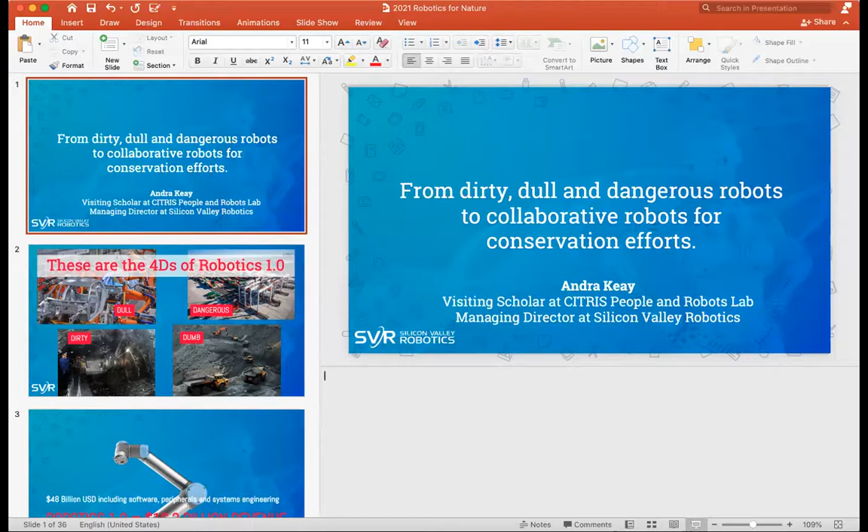I gave this presentation recently, and it's a more specialized one than I would sometimes do, but there are some key concepts that I want to raise. This one is focused on robotics for science and conservation, which I thought you might find pretty cool.

I want to start with some of these key concepts, because very often people are very familiar with their area of robotics and they don't have the opportunity to see the big picture. Whereas I'm really focusing on the big picture.

You've probably heard that robots are good for the dirty, dull, and dangerous jobs—the 3Ds of robotics, I call it.

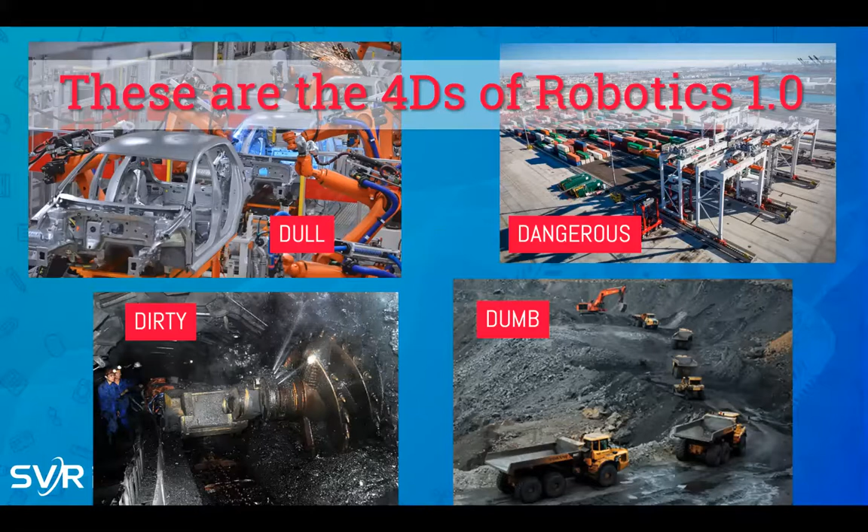Okay, so I call it the 4Ds of robotics, because these robots are dumb. I refer to this as Robotics 1.0, to help people understand that we've had a sea change in robotics that is far more than just more robots.

We've had 50 years of Robotics 1.0, and they're dirty, dull, and dangerous robots—dumb robots, doing dirty, dull, and dangerous jobs, quite dumb, repetitive jobs. In fact, these robots don't meet the standards for what is a robot now. They are just not reprogrammable enough in many cases, or they're not reprogrammable without a lot of expense and effort.

50% of the Robotics 1.0 industry is still doing nothing but welding automobile bodies. That was the first thing these robot arms were put to work doing, and that is still 50% of what people talk about when they talk about the robotics industry. That's not the robotics industry that I know or see, and this is why I call it Robotics 1.0—to really emphasize that things are a lot different.

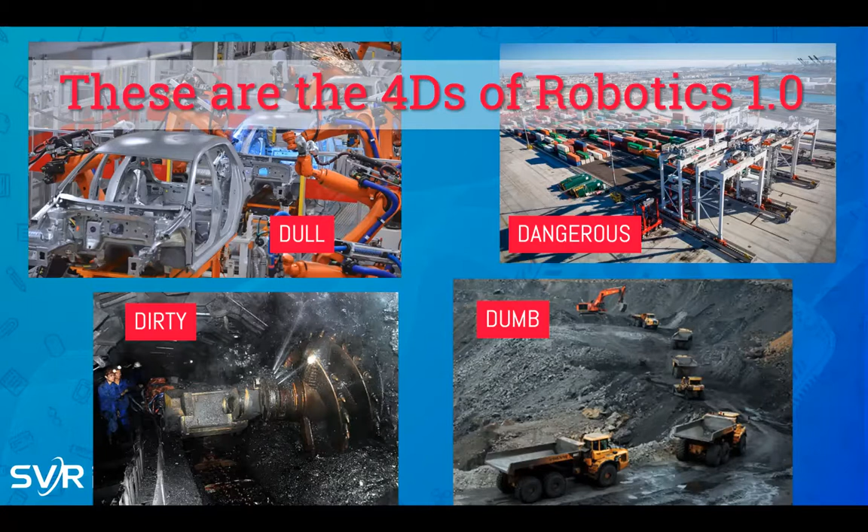Now, it's not that robotics 1.0 is not important. It is a large chunk of what's happening in robotics. It's worth approximately 48 billion last year, which was approximately 18 billion for the robots alone, and that's 48 billion cumulatively when you bundle it together with the software and the servicing, which is usually how these robots are sold, as like a full package.

And what we're in, and we have been since around the start of 2010, is the robotics 2.0 era, which is quite a paradigm shift. And we will move to a different era of robotics, but I don't know exactly when. It might be 50 years from now.

And one of the issues that we find is that you will see research videos widely promoted in media, and it can be tricky to know which of these are really robotics 3.0, nowhere near real world yet, and which one of these are actually rippling out into the real world. So there's a couple of criteria that robotics 2.0 has as well.

And one of them is inspired through the growth of the self-driving car. Most cars these days are robots. In fact, pretty much everything from 2008 qualifies as a robot, at least within parts of the systems. We don't need to have level 5 autonomy in cars to have robotic systems. Most roboticists that I know have spent some time working on autonomous vehicles, or still do. And it's not simply self-driving vehicles, of course. It's autonomous vehicles across the board.

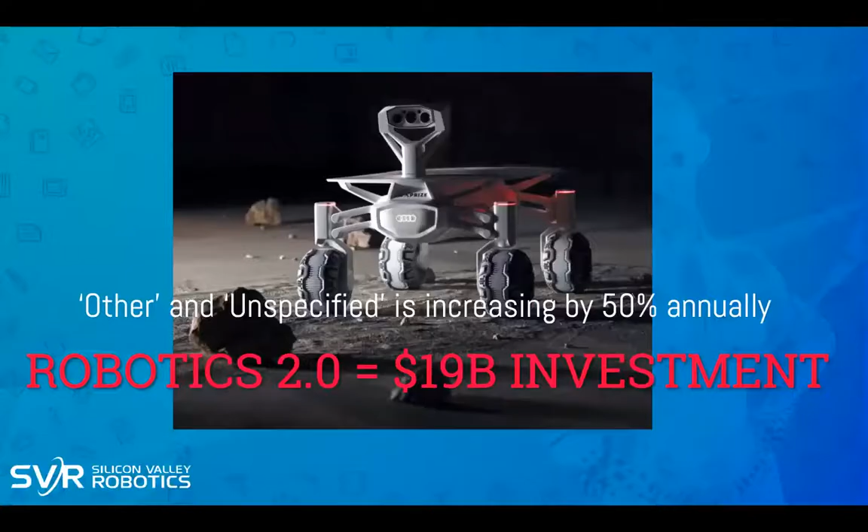Now, robotics 2.0, you don't measure it by looking at revenue because many of these companies are pre-revenue. And that's why it doesn't appear in a lot of the robotics industry discussions. It's simply not on their horizon yet. But if you measure funding, investment into robotics, then you can get a much clearer idea of what the shape of robotics 2.0 is, because right now it is largely investment funded rather than revenue, although that will shift over the next 5 to 10 years.

Now, these are categories that the robotics industry, the robotics 1.0 industry, calls other and unspecified. They're growing exponentially each year. And in 2020, it was a total globally of $19 billion in investment. So you can see that the investment in the robotics industry is actually greater than the pure revenue from the old robotics industry. And that's just a sign of how much things have changed in the last 10 years.

Dr. Gill Pratt, who is now managing Toyota Research Institute, who when he was the head of the DARPA Robotics Challenge, he said, I think we're having a Cambrian explosion in robotics. And I think he's quite right. And I think he's particularly right because if you really look at Robotics 1.0, it's primarily stationary in many ways.

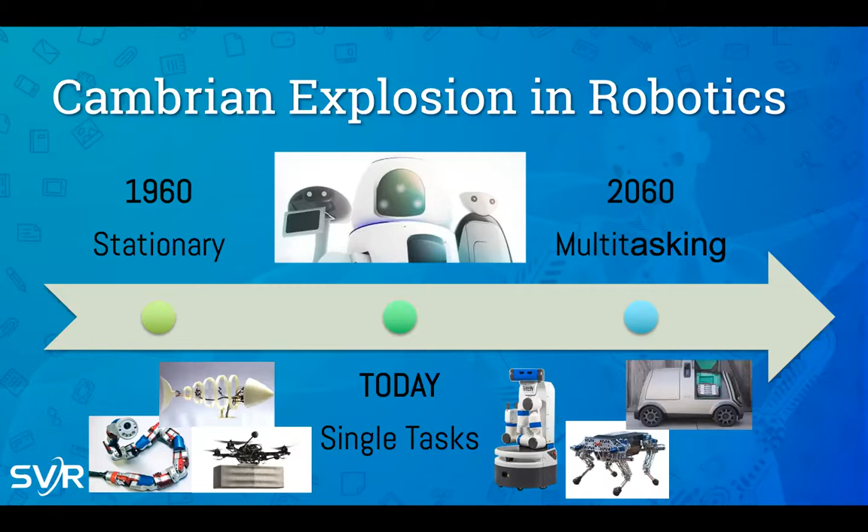Robotics today is mobile in the sense that it has the ability to navigate.

And the Cambrian explosion biologically happened because of vision. Small little worms and tiny organisms developed a visual sensor. And that allowed them to chase their food, not just squirm their way in and out of patches of food. They were able to direct themselves towards food. And often that meant other organisms, so they also started to run away. That led to a really rapid evolutionary period where the basis of every single phyla or category of biological life emerged in a very short time frame, comparatively speaking.

And I think that this GIF, I love it. I think it expresses both the biological Cambrian explosion and the robotic Cambrian explosion, because you're probably all familiar with robot vacuum cleaners. And you know that the original Roomba vacuum cleaner was very stupid. It was modeled on insect behavior with Rodney Brooks's subsumption architecture, and it didn't map. It didn't have sensors other than it had a bump sensor to detect when it hit walls. It had a little dirt sensor so that it would circle when it hit a particularly dirty patch, and it might have had an edge of stair detector.

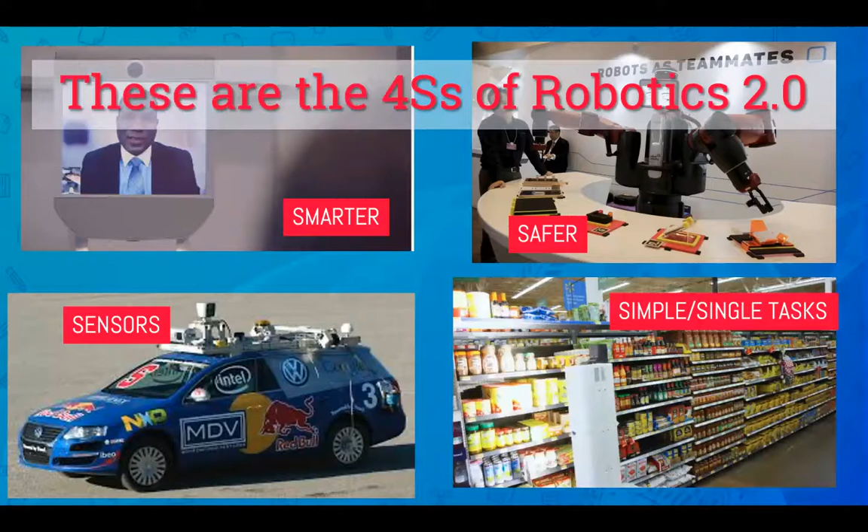For example, you can see one of the shelf scanning inventory robots on the bottom screen. A lot of these companies, like Fellow Robots, were among the first to launch a shelf scanning robot, but it also acted as a guide, a part scanner, and a greeter. It was doing a lot of different things as they were experimenting in the Lowe's Hardware Innovation Labs.

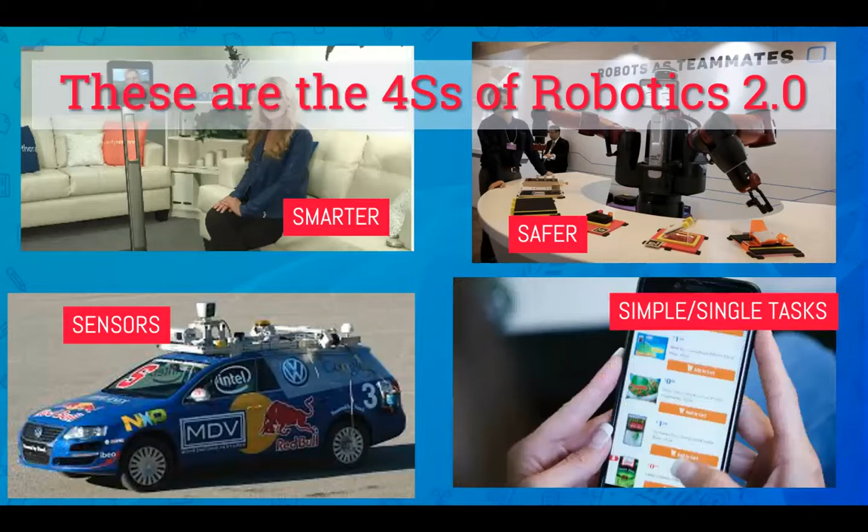What propelled an increase in the uptake of inventory robots? You've got Simbe Robotics, Bossa Nova Robotics, Fellow Robots, and now a lot of inventory companies building robots. You have mobile robot companies like Fetch Robotics partnering with inventory companies so they can do inventory robots. It is now a thing, inventory scanning robots. That was really a beachhead market—the one task that made a significant difference to the operating costs for a retailer.

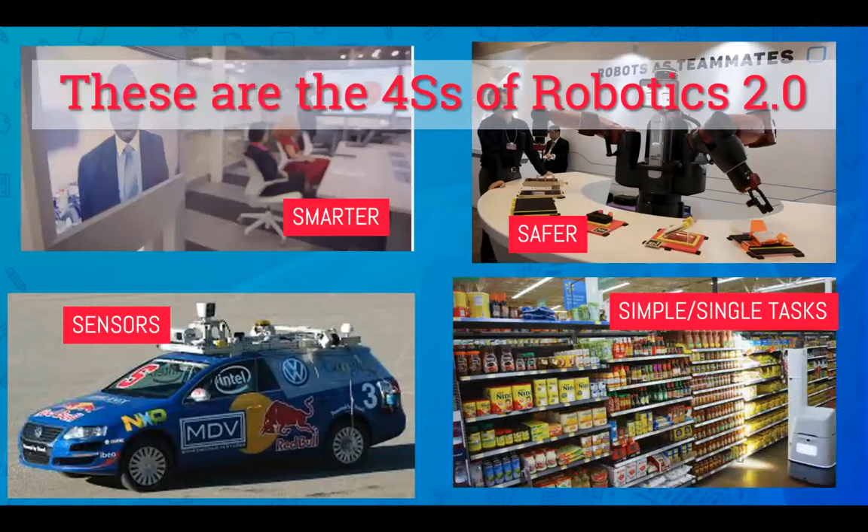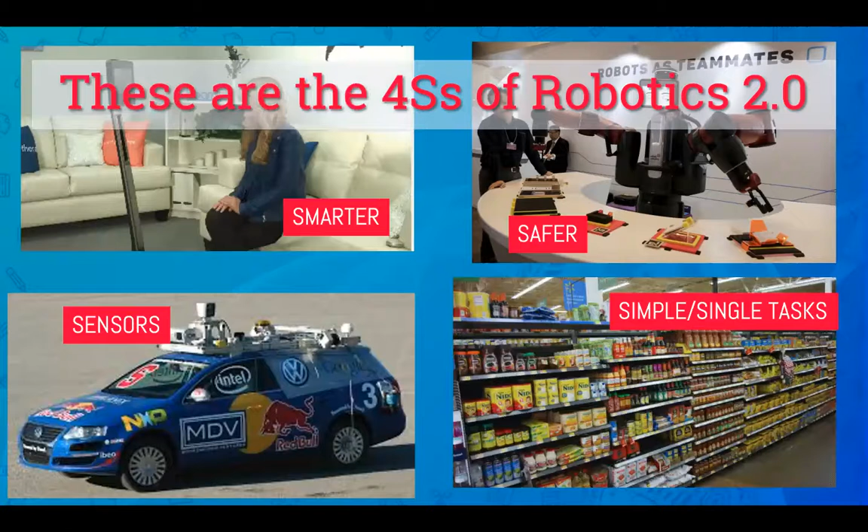Now that those robots are in the store, I think we will start to see a variety of tasks. But when you're trying to get into the market, offering a variety of things turns out not to be the best strategy. So at the moment, I have S for simple tasks and single tasks, because I don't want people thinking that robots are general purpose. That's, I think, a Robotics 3.0 thing.

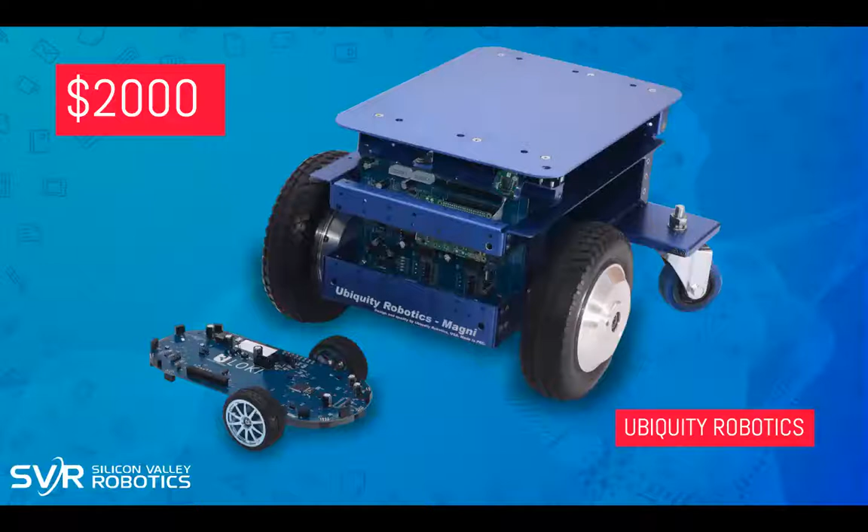Let's move along. Since this Cambrian explosion and effectively an innovation arms race in the reduction of cost of computation, of power to a lesser extent, and of sensors, we've seen low-cost robots emerge. You can get more or less a whole robot stack for less than $10,000.

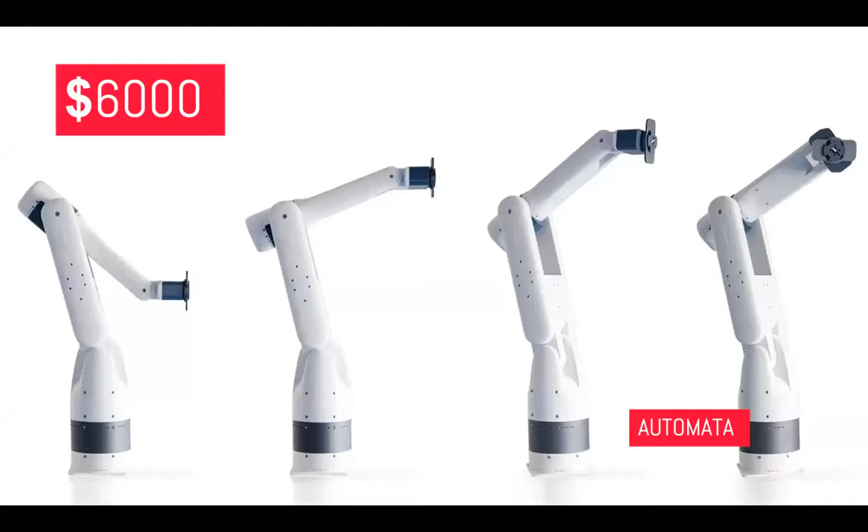But the Eva—no, this is Automata, which is based in the UK—and you have Haddington Dynamics, based in Las Vegas, that Ocado just acquired. They were offering a robot arm for about $7,500. There's a number of other companies that have launched in the last 2-3 years. The verdict is still out on the reliability from an industrial perspective for some of them, but you can definitely get robot arms for less than $10,000.

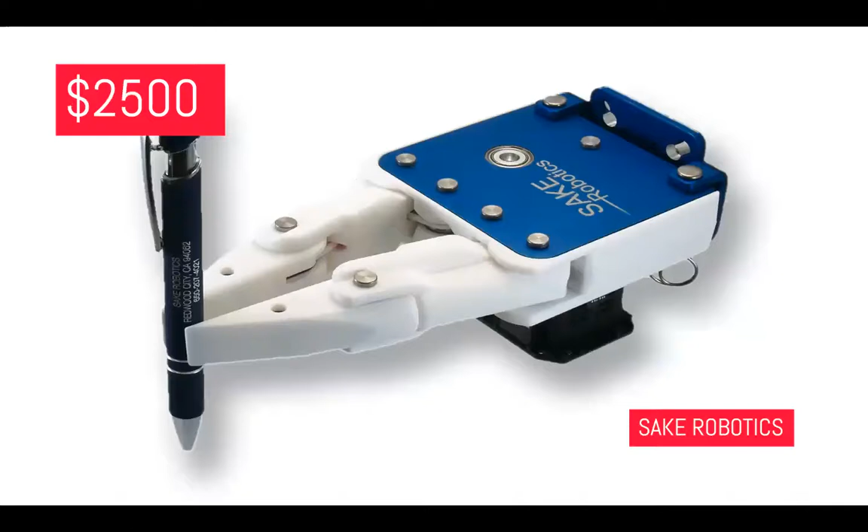It used to be that the end effector cost you $25,000 as well as the arm, whereas now you have companies like Sake Robotics that have a very effective 3D printed gripper for $2,500. I think we are seeing a lot of innovation in this space, primarily through 3D printing.

We saw a real flurry in the last 10 years of soft robotics grippers, like the jamming gripper from Empire Robotics—if people juggle, it was like a juggling ball, a globe full of something like rice grains, which when you pull vacuum through it deforms around an object, even something terribly difficult to pick up otherwise, like a flat key. That's another innovative gripper.

Or you have something like the electrostatic adhesion that Grabit used, which came out of SRI International. So we've seen a lot of innovation as well in the gripping space. It hasn't percolated the market as rapidly as I thought it would, but I think that's because it has to go on the end of an arm, and the arm market is still dominated by the Robotics 1.0 companies.

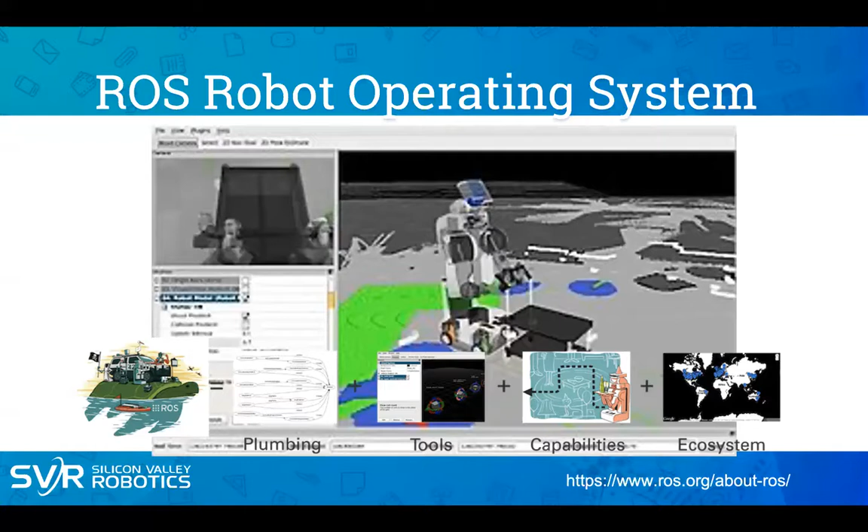The other thing that has happened, released in 2010, is Robot Operating System, or ROS. It provides you with the plumbing and the tools to increase your capabilities to build on the work that others have done, and do it repeatably over and over again. We've seen that downloads of ROS have gone up hugely.

When talking to startups, what I've noticed is that it went from just the startups involved in open robotics and Willow Garage using ROS, to almost 100% of startups using ROS, not necessarily in production code, but in getting off the ground. The impact ROS has had on the growth of the commercialization of robotics is immense.

And I think this leads to a couple of interesting things. Robots are getting vastly more usable, and this is on the piggyback of smartphones and tablets. Any of us who have children or nieces and nephews, or have seen toddlers in coffee shops, know that the average baby can operate a tablet, no problem. So we've really just been training the next generation of robot operators.

Yes, we do need to do more education in robotics, but it isn't going to be a case where there are people with degrees that can work on robots, and then there's the rest of the world. No, it's not going to be that case at all. In fact, robotics is incredibly increasing the number of jobs out there around operating robots.

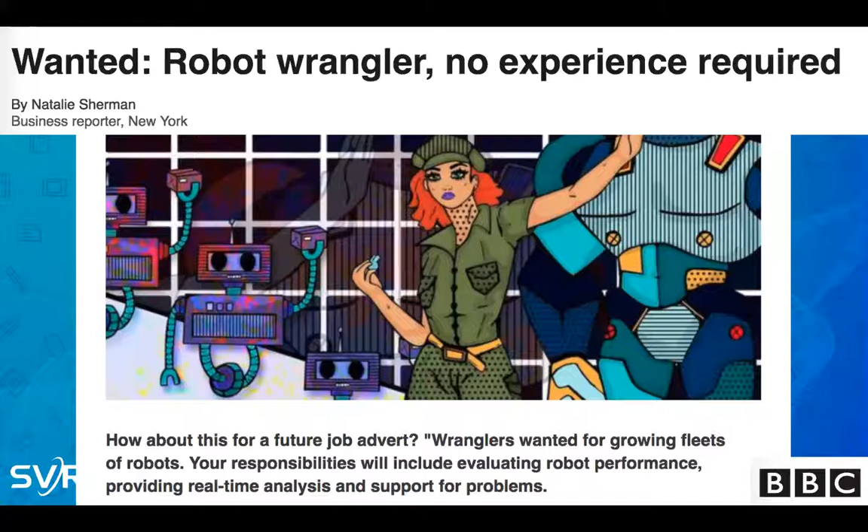But let's talk about robots for conservation and science. One of the things that I loved watching was the growth of the OpenROV community. And indeed, we built some versions of that.

I think the Office of Naval Research had launched a school kit, an educational kit for a remote operated underwater vehicle. Of course, these OpenROVs were largely remote operated, but they introduced the world to this idea that you could get your hands on something else. Like the drone community had grown hugely around 2013, 2014 on the backs of the growth of the ArduPilot community. And this rippled out literally into underwater robotics, which I thought introduced a lot of people, because these devices were affordable. One of the beautiful things about this is it introduced people to robots who weren't interested in them as robots — they were interested in them as tools for their research or exploration.

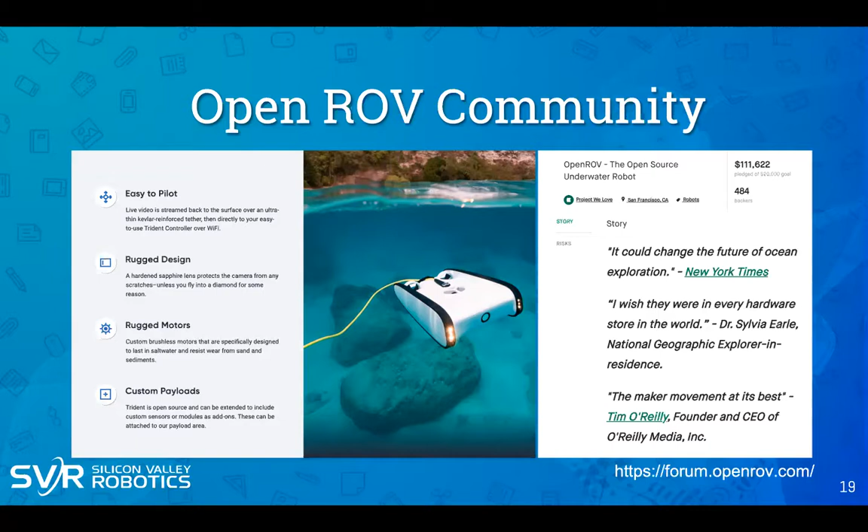And since then, the use of robots for conservation and science has continued to increase.

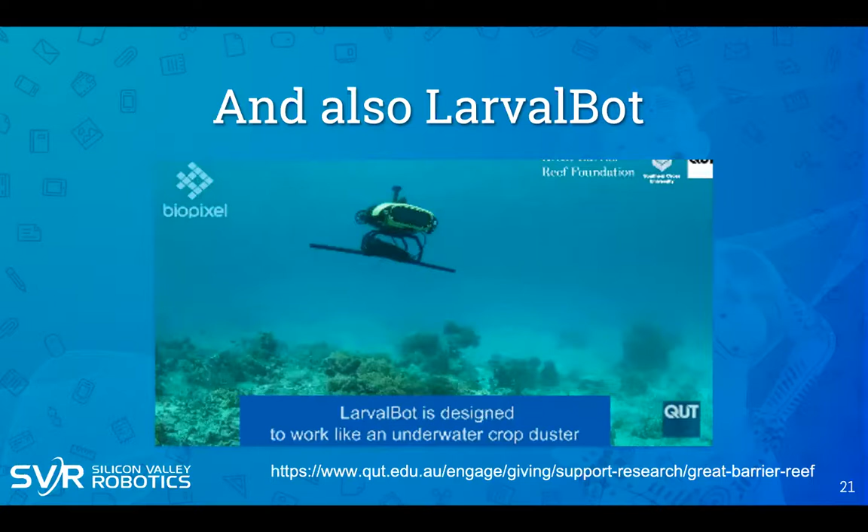Now we're starting to see new projects emerge. This one is called LarvalBot, and it's harvesting coral larvae. It can carry about 1.5 million coral larvae, and healthy corals release hundreds of millions of larvae. Just 2 or 3 of these robots collecting the larvae can spread it over thousands of square meters of damaged coral per hour per robot. So we're looking at a lot of reef regeneration, which is critically important in this era of temperature change, since that's another significant contributor to reef die-out and coral bleaching.

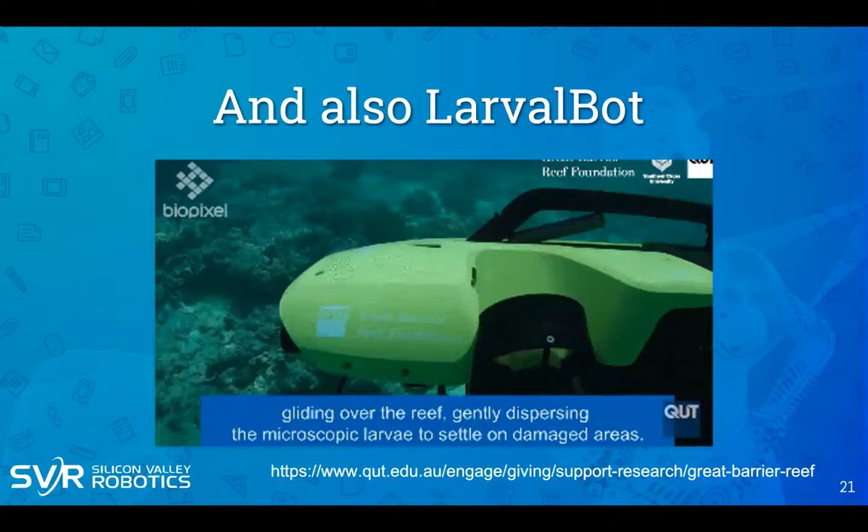You've probably seen the wonderful, beautiful mermaid robot from Stanford. It's called Ocean One. In 2016, its very first voyage was in the Mediterranean, recovering treasures from the shipwreck of Louis XIV. It's a pretty complex robot because it provides a lot of haptic feedback for the operator up on the ship.

Oussama Khatib, who was operating it for the first mission, was able to recover a vase from the shipwreck and pick it up with the robot without breaking it, bringing it all the way to the surface. I wanted to mention the impact of robots in archaeology, although you're probably familiar with the work of James Cameron's team as well, which is very cool.

One of the startups that I met back in 2015, when it was just an idea and a prototype, was Aquaai. They had a vision of saving the world's oceans, focusing initially on aquaculture. They built a fish robot for research in the oceans, under the idea that a fish robot would be less disturbing than a regular robot. That actually turns out to be true.

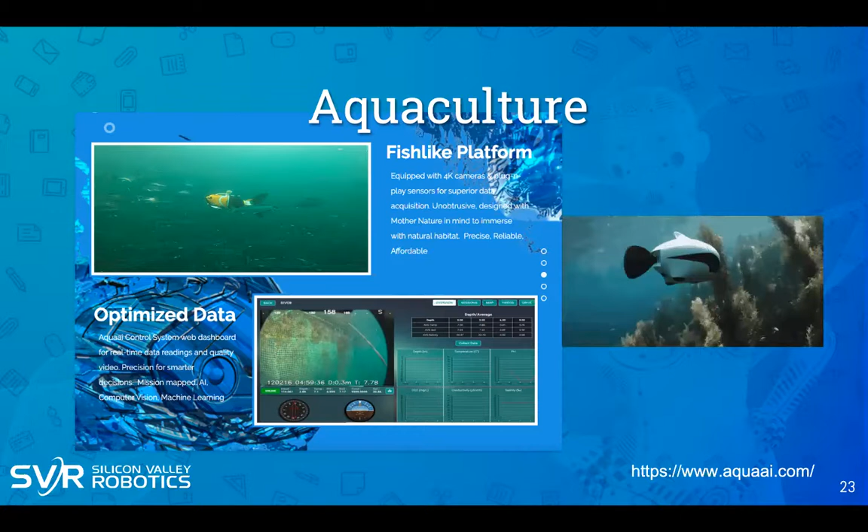I think they've really been going great guns. They've gone from seed funding to Series A funding, and it takes a while. I have to say, getting your robot startup doing something completely new off the ground is a slow process, but it's happening twice as rapidly today as it used to.

I mapped the length of time it takes startups to get off the ground in robotics, and up till about 2012, the average duration was 8 to 10 years. Now I've seen robotic startups launch in 2 to 3 years, and the average time to get Series A funding is 4 to 5 years. That's half or twice the pace it used to happen, at least in the Silicon Valley Bay Area. If you're somewhere else, you're probably more grant reliant and or more regional funding reliant, and that's both a good and a bad thing.

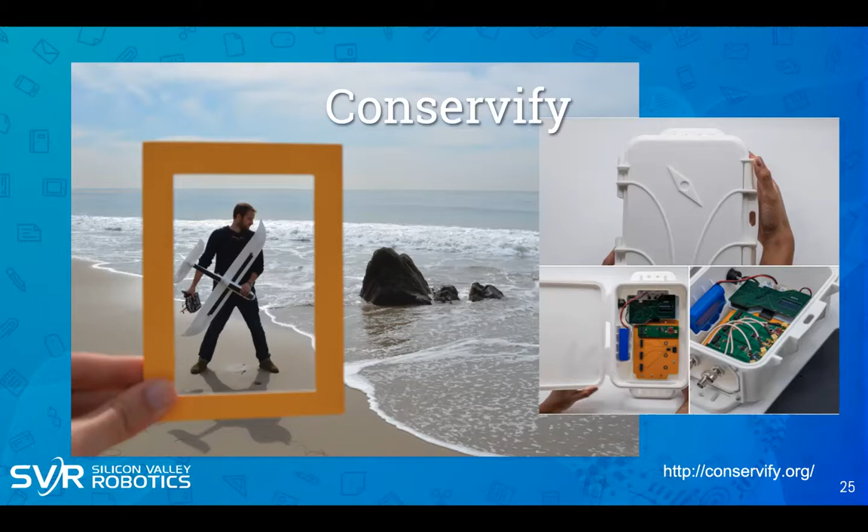I put Conservify in because they've launched a set of field kits, because one of the other issues is providing a full stack solution. A drone on its own is not that useful to a scientist, but if it's been designed to carry a standardized testing kit, then you've provided something far more useful. So it's actually the provision of the test kit that is the valuable part now, and I think that's a really interesting way of looking at what's happening in robotics — how people are customizing a payload and an application.

Drones for Good is another of the projects, largely sponsored by DroneDeploy, and that's one of the most widely spread uses of drones for good out there. What's interesting here is you can see one of these shows the mapping in the aftermath of the Santa Rosa fires and the Camp Fire. Some of these show post-earthquake in Mexico City, and some of these are fire and burn management tools.

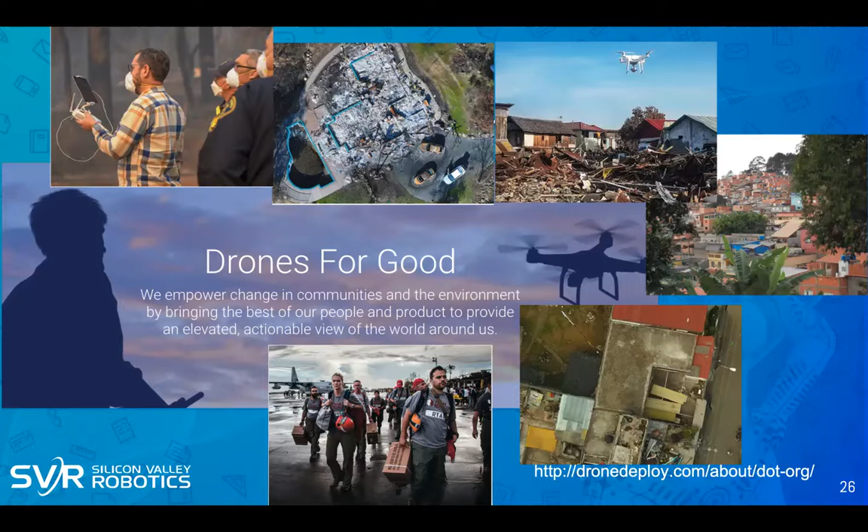For example, in Australia, drones are being used for back burning management. There is a new program in Australia called Indigenous Rangers, where looking after the land is the job of the people that traditionally look after the land, and this program is expanding a lot. What's happening is that the traditional land owners are utilizing technology to help them.

One of the big projects, which Microsoft has been supporting with their AI, is looking after turtles — detecting where turtle nests are and being able to help protect them over that very delicate journey into the water, where they are frequently picked off by predators, or monitoring for signs of carpet snake incursion or any of the other predators that eat eggs from nests.

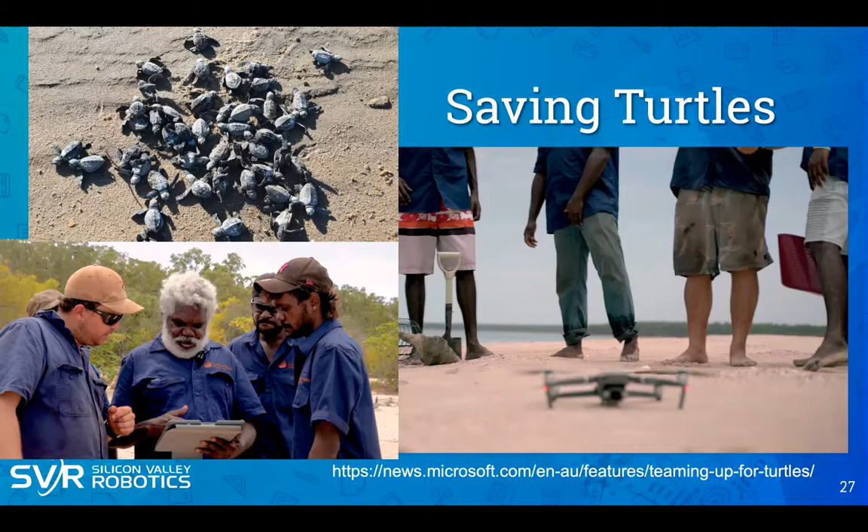The other thing is managing fire burns. It turns out that Australia has a far more diverse landscape than it would if we let it go bush alone — just discovering one of those misconceptions. Scientists, historians and conservationists thought the best thing to protect the natural landscape in Australia would be to shut it off, keep people away from it, and let it return to its natural condition. They've discovered that the natural condition becomes taken over by only one or two species, not the diverse landscape, even in desert, that we're actually used to.

It turns out that the Australian Indigenous people have for about 60,000 years been practicing burning parts of the landscape to open areas up for various new growths, and by doing that, they've encouraged a much broader range of cohabitation from other species. So now there's a turnaround in thinking about how to manage the natural landscape in Australia, leading to the launching of the Indigenous Ranger programs and the Indigenous Protected Areas program, where the Indigenous people are in control of how the land is looked after, and they're using technology to do that.

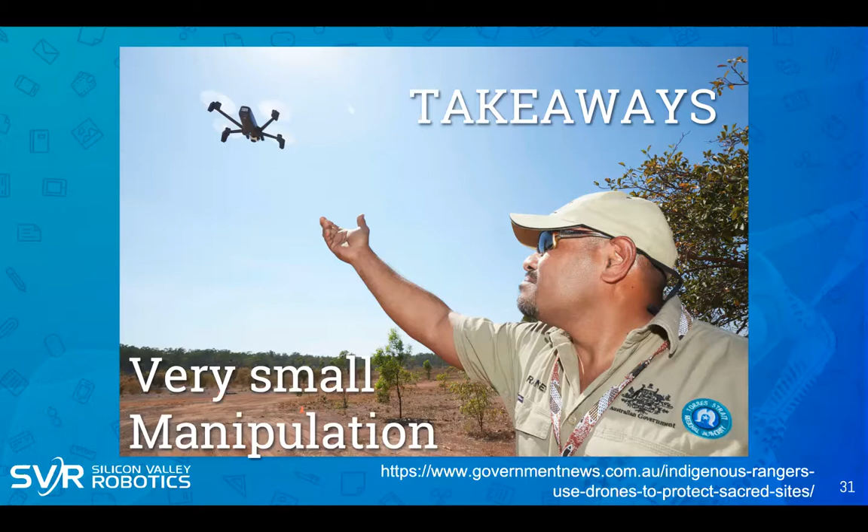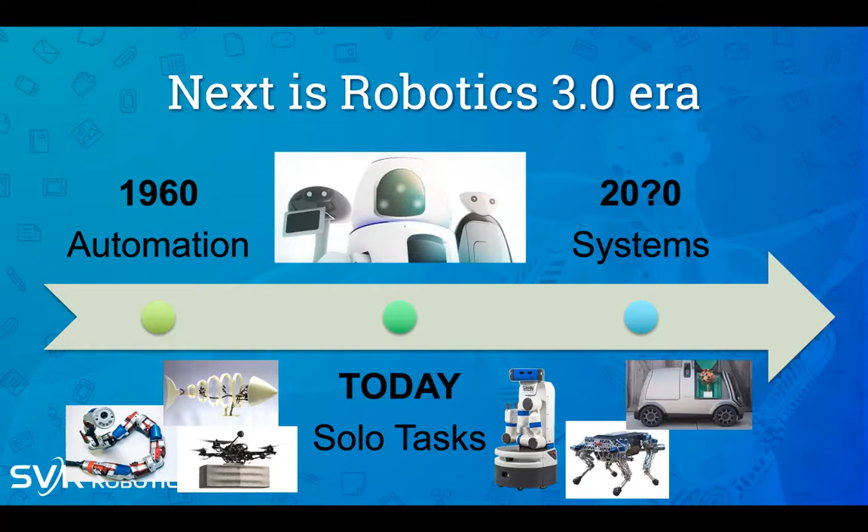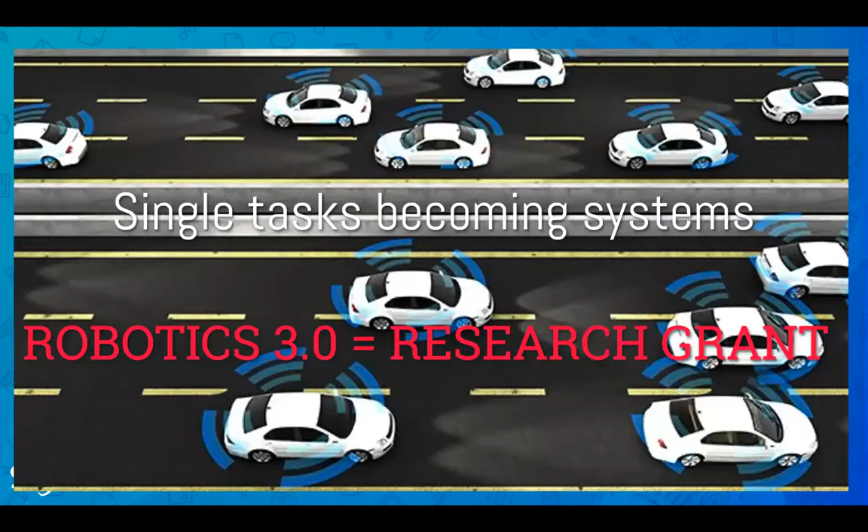And next up, robotics 3.0. Don't quite know what it is exactly. That's a lot of research videos, but some of the research videos you've been seeing, if it has the characteristics of robotics 2.0, then that is actually commercializing in the world right now. You probably recollect the phrase that William Gibson made popular in an interview with The Economist in 2003. He said, 'The future is already here. It's just not evenly distributed yet.' And that is certainly what's happening in robotics.

I think a key thing for robotics 3.0 will be single tasks becoming system-wide tasks, multi-agent robotics. This is my thoughts about what it's going to look like: the 4 M's of robotics 3.0: multitasking, multi-agent, and I'm bending the analogy a little bit, emotive, as in able to contextualize a social interaction and respond appropriately, and morphing, soft robotics, shape-changing robots. That's something that is in the research lab and is very cool.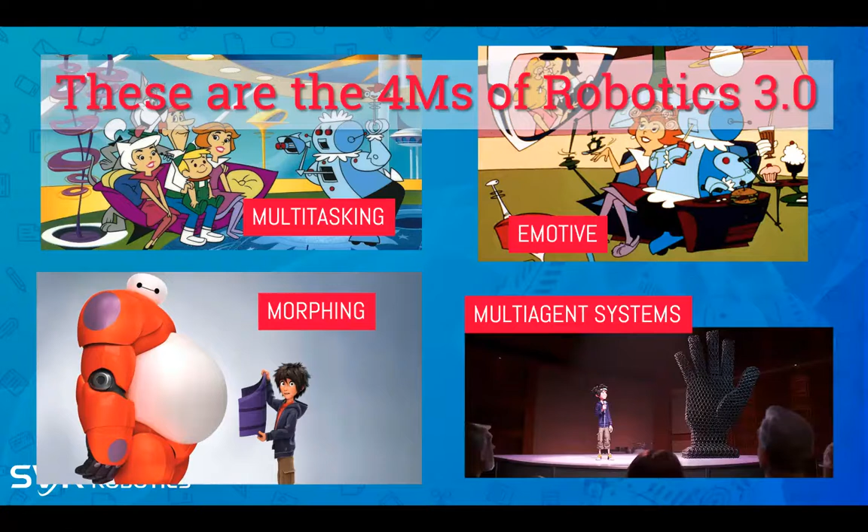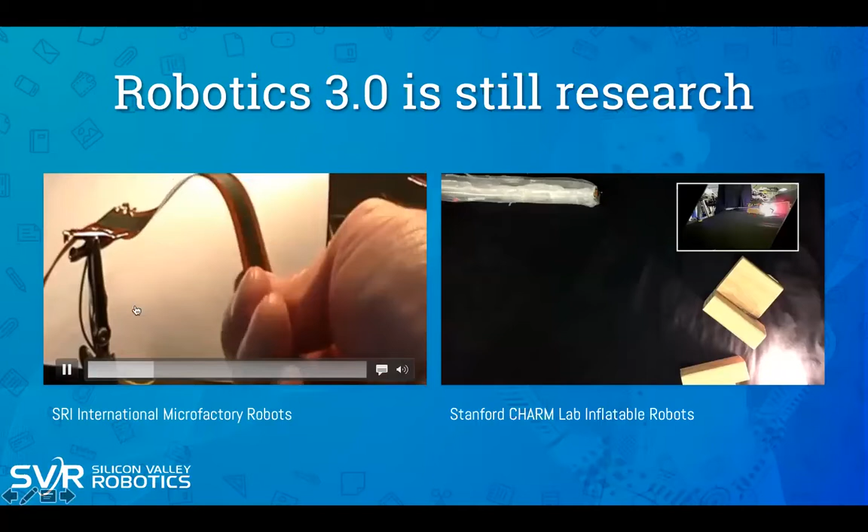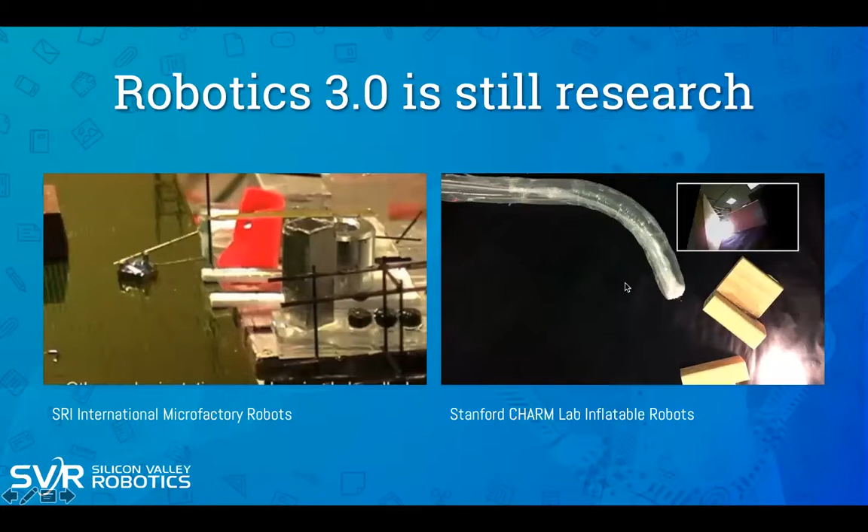Oh, and of course, I'm using the Big Hero 6 slides because it's my favorite robot documentary, and it was informed by a lot of the robot labs in the Bay Area. As you can see here, this is the micro factory from SRI International, and they can do multiple robot coordination. And this one is the Charm Lab, Alison Okamura's lab at Stanford, working on soft robots capable of a range of tasks. They're capable of performing manipulations in the real world now.

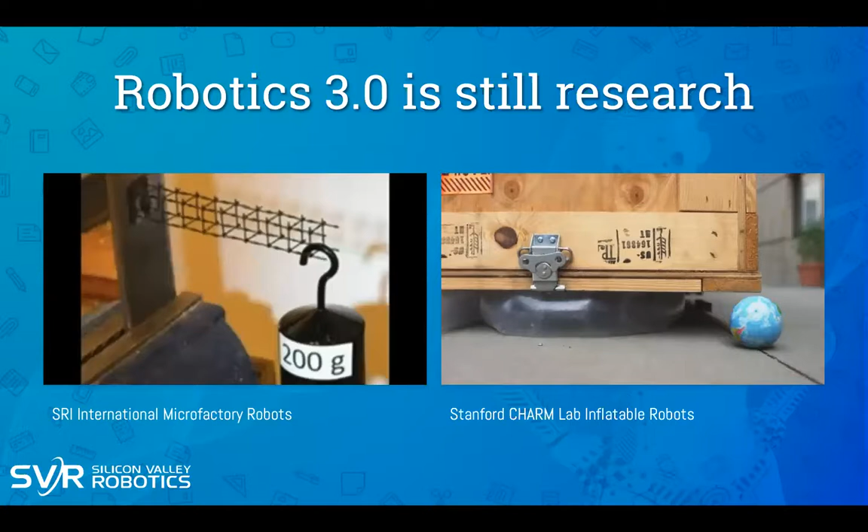This is a couple of years old, these videos, so it's undoubtedly progressed, but they're still unlikely to be commercialized for quite some time. But I think that's where the future is going to be very interesting. And now it's time for questions, and I'm sure we are going to get some great questions.

Actually, I've got to admit, you touched on everything I'm excited about when it comes to robotics. Cultural aspect, environmental, and soft robotics. With soft robotics, what do you see as a future or even commercial potential for that one?

Well, the original development of soft robotics was some DARPA grants for battlefield work. And I think we're going to continue to see medical applications, we're seeing it most in exoskeletons, potentially prosthetics, because it's much more affordable, and anything that's touching on the human body, it's ideal if it's soft. And yes, Zipline is also working in the United States as well, doing medical deliveries now. So that's one of the significant changes. They've taken what they've learned in Africa and they're working globally, but they're also working in the United States.